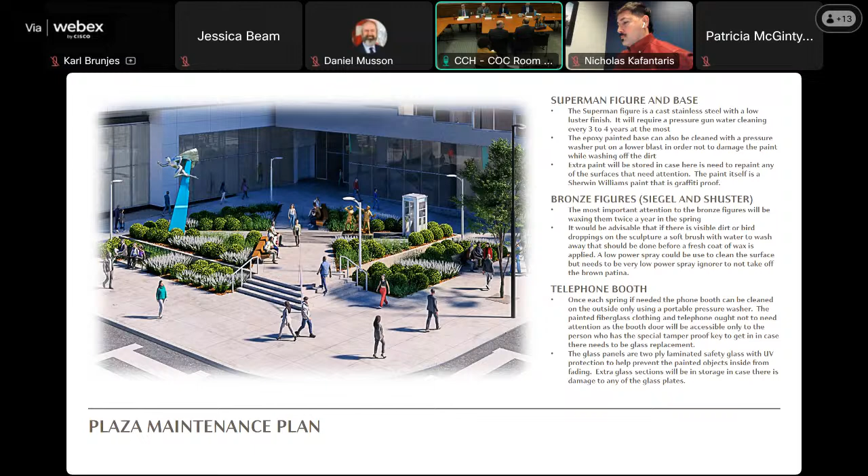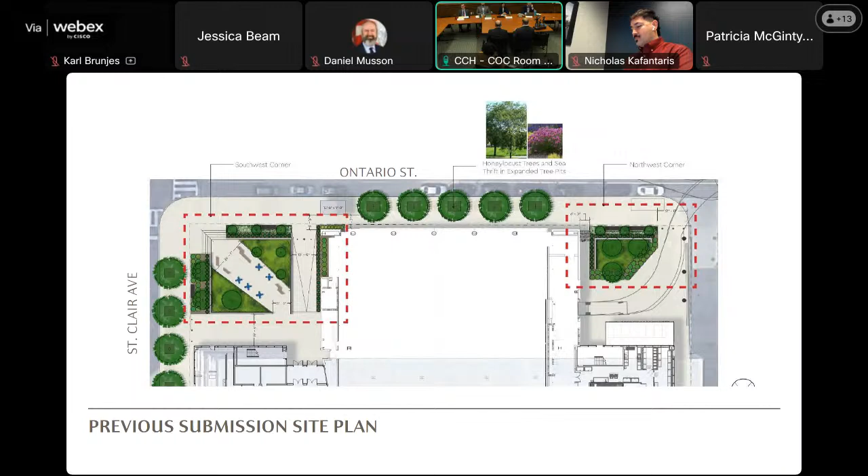When this first came before the commissions and committees, we had presented the following site plan where it was a diagonal swath of concrete that cut through this site with 2 landscape areas on either side. There was a big point about trying to maintain green space. We're trying to keep in mind stormwater runoff, so permeable surfaces were ideas that we wanted to keep. We were looking at this being an activated patio space with some patio, bistro tables and chairs, some soft wood bench seating, and various plantings, as well as adding some trees and foliage to keep verticality and height for green.

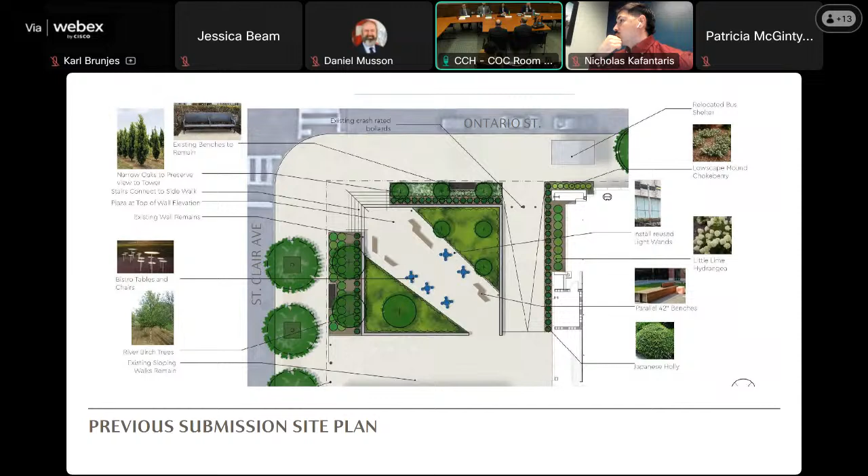When we were approached to kind of reinvent this plaza for the Siegel and Shuster Society, the statues for Superman and Siegel and Shuster, we thought of how we could incorporate these and tell a story. What we decided to do was to narrow that concrete path and cut a transverse path in the opposite direction of permeable pavers to keep that permeability. The design of that opposite path is actually reminiscent of the Superman shield, the S shield that he wears. If you would like to envision it, it is the shield cut in half, flipped and mirrored and pulled, with one side being a little bit larger and smaller and connected. So as a viewer, you're able to get that connectivity to the character just through that representation.

We've also added some areas of green space. This is just grass planting, for people to move outside of the plaza, a little bit more freer space around the area. Again, this is about a 50 by 50 plaza, not very large. We are still looking at adding some wood benches, this time backless, to allow for somebody to view from either side if they'd like to get a better view of Jerry, Joanne, and Joe, or if they would like a view of Superman. And then various plantings around as well. The lower benches that ran along the public right-of-way are being replaced by similar wood benches, backless, as well, and planting is brought around those.

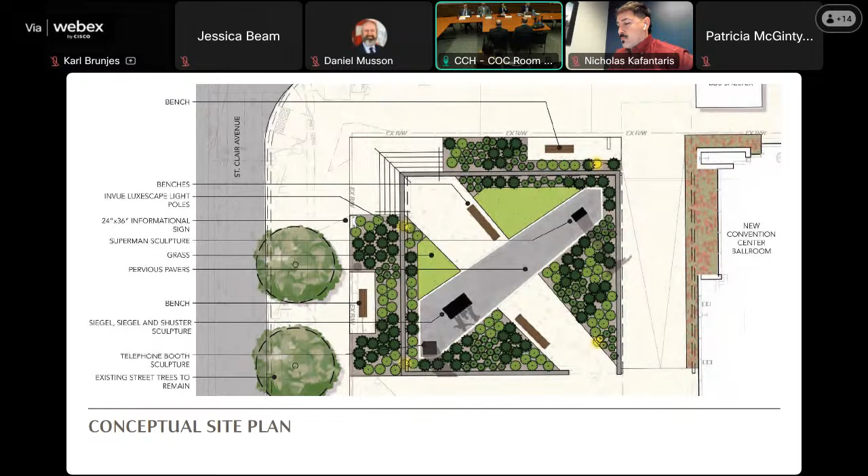As for the benches, we are looking at something backless, again trying to maintain the idea of Superman with that diagonal pitch to the legs of the bench. Pervious pavers will have a field of light and dark gray.

For the planting itself, we're looking at threadleaf blue star, bridal veil astilbe, and tater tot arborvitae. What we're envisioning is something soft, a cloudiness that Superman is flying through. We're also keeping in mind that these plants will change from fall, winter, spring, and summer.

For the site lighting, we're trying to keep in mind a level of futurism, metropolis. Superman's home is the city of tomorrow, and his other moniker is the man of tomorrow. So we try to keep something a little more futuristic, a bit of that UFO look as well, to correlate to his alienness.

Getting more into the detailed drawings, you can see our architectural site plan, as well as a detail for lighting. We are looking at in-ground directional lighting to illuminate the statues at night, as well as 4 light posts around each corner of the site. There'll be an even height depending on location: if on the lower portion of the site, a 14-foot post; on the upper portion, 12-foot, for an even light throughout. We can provide photometrics if needed to show we are providing adequate lighting.

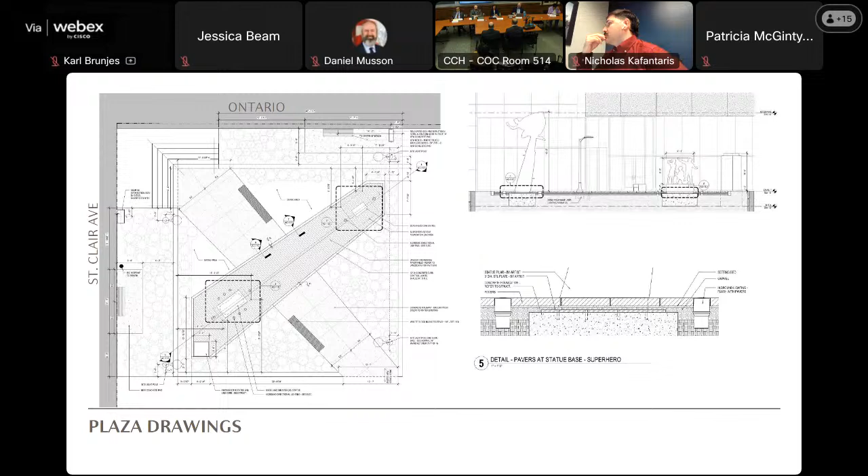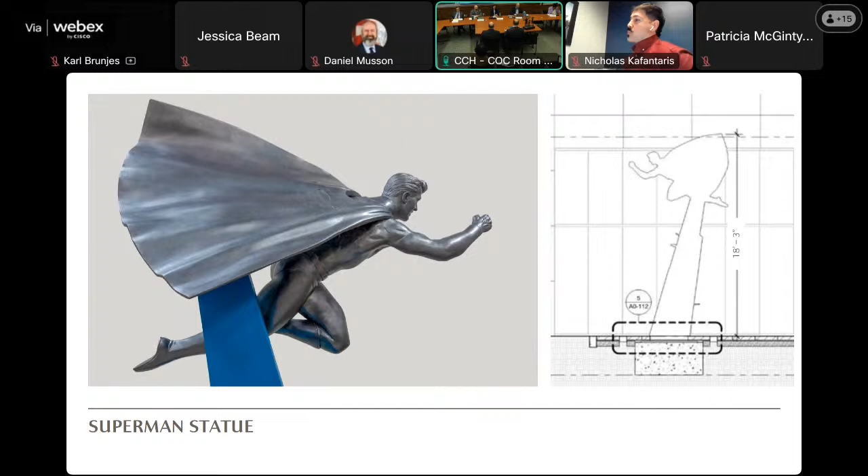The statue of Superman will be in stainless steel, an homage to his moniker, the Man of Steel. A little more detail: he'll be 9 foot, a little over, from tip of fist to tip of toe. His directionality will be faced toward the new ballroom expansion, so if you're in the ballroom, you'll have a front view of Superman. Some nice photo opportunities from inside and outside the plaza.

We are looking at how this base will be constructed. The plaza itself will be installed very shortly, within the next couple months. The statues later on, about 6 to 12 months out. So we did want to keep in mind that we don't want to leave just pavers empty, so it'll be a paved plaza with these permeable pavers. We'll remove them, foundations will be poured now, and then when the statues are ready, they'll be placed in position and pavers replaced.

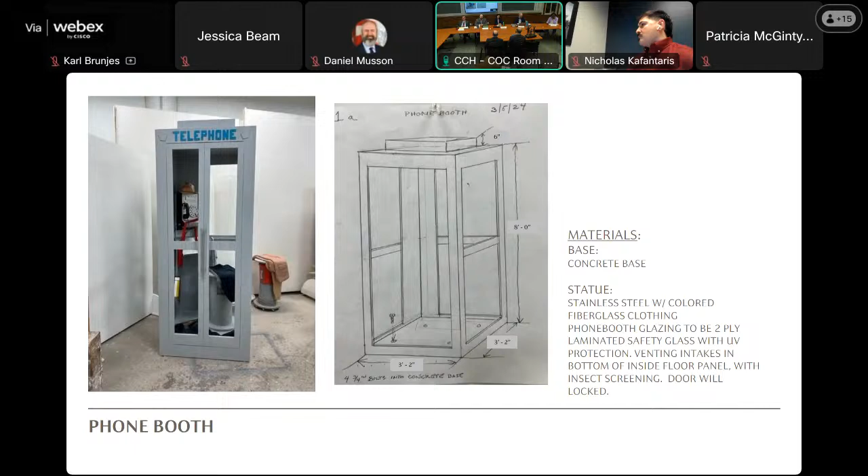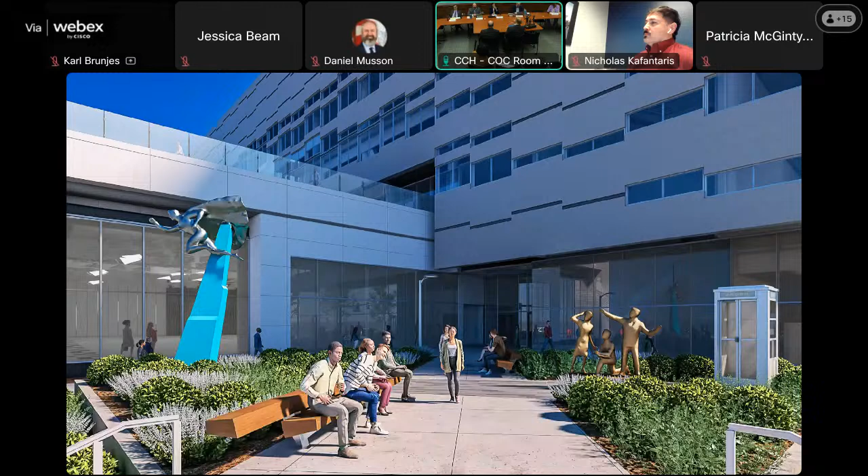So you can kind of see here the pointing up and observing, Superman flying off to save the day. You get a better idea too of how you can see from in that ballroom out what you'll kind of see of Superman. You won't be looking at his toes. And again, this is an older rendering.

The benches will be backless now, and behind the gentleman sitting there on the bench will be grassy areas. We tried to stay away from grassy areas behind the statues, figuring that most people probably aren't going to want too many views of behind.

That being said, we did keep enough space around each statue for accessible movement as well. Some of the best views, however, are going to actually be off of the plaza, right off the public right-of-way. Again, these benches will match the benches up on the plaza now, be wood backless benches, so that if somebody wanted to look up at Superman rather than look out toward Ontario, they could, or St. Clair respectively.

And we are trying to keep in mind, one comment was to place markers for photos. We'd like to install first before doing that, just to get an idea of how this actually looks, actually experience it in play.

And here finally you see a night view. This is an artistic representation of the night shot. This is not fully accurate to what it will look like. There will be more adequate lighting, street lighting behind, and of course probably some lights on in the building as well. But we really wanted to show you kind of what we were hoping would become almost a focal image.

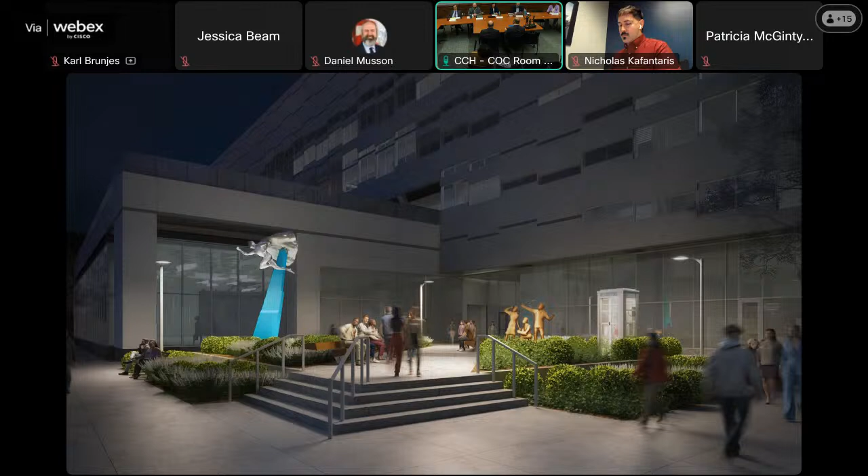Of, you're watching Sunday night sports, maybe the Browns are playing, or maybe you're watching the Cavs game and they do those shots around the city. And we hope this would be one of those shots you'd start seeing, making sure everybody knows that Superman was made in Cleveland.

Jerry, as I'm sure many people know, Jerry and Joe were from the Glenville neighborhood, two young men who created what might honestly be one of the biggest pop culture icons in our nation's history, if not the world. They created the superhero. If not for Superman, we would not have the cultural landscape that we have today. Marvel, DC, and the litany of other characters, homages and pastiches of each, wouldn't exist.

And we want to honor that. They're Cleveland born and raised. This character is a part of Cleveland's history, and we're really excited to honor it. So that is all I have. Thank you guys so much.

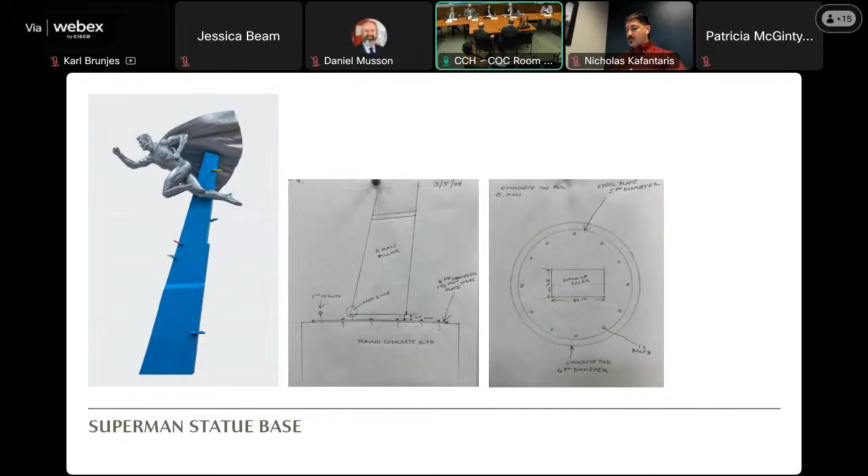You mentioned the paint. On the paint color, the first, lighter color was the color we had in those photographs. On the site it looks lighter, but that's because of how the computer registers color. The question was whether a slightly darker color would be better for the area, and I agreed with that comment, so I came up with this slightly darker blue. It's deceiving in this room because of the low light, but outside that darker blue will still pop a little, just not too much.

I was more curious about graffiti. The paint, I had used Sherwin-Williams paint on a big sculpture in Austin, Texas about five years ago, and somebody about a month after it was installed took white paint and painted over it. The next day they cleaned it off, and you could not tell. They didn't have to repaint it or anything, they just washed it off. It's an extraordinary epoxy paint.

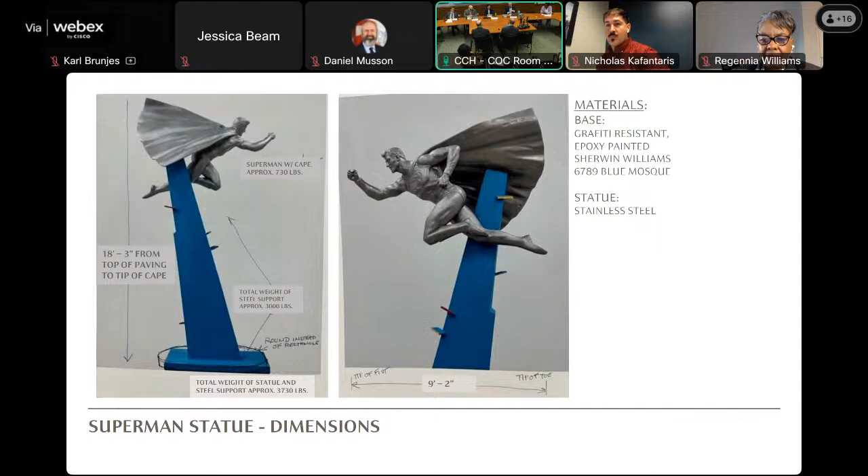I guess I'll make my comments. I reinforce Mr. Samberry's question. That would be my concern, just knowing people and how they like to climb everything, that the projections may not encourage, but also not deter, people from climbing it. I'd encourage you to look at how far they project out. I like the movement it provides, but the projections do concern me a little bit, knowing people will climb anything.

And anything over an inch, somebody can climb if they really want to, because of rock climbing and things like that. So I would really focus on those as you're developing your final design. Would some be better as a recess, something cut out that could be painted, to not provide enough distance so people can't climb the base?

My only other question or concern - I should say I really do like this entire composition. I think it's a wonderful location. I like the irony and I like the design, but my only question relates to the materiality of having 5 different materials between these 3 different sculptures, and not having that thread to allow people who may not be as familiar with the Superman story - it's very understated, which I like - but at the same time, that thread that ties them all together so people know this is not 3 different sculptures, it's one story being told. Because you have the stainless steel, the bronze, the granite...

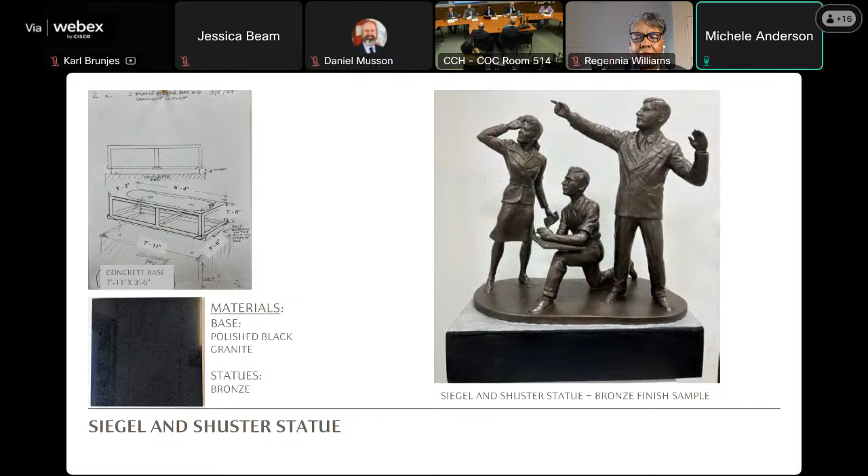I want to say that I am in agreement with all of my fellow commissioners and their wonderful comments. This is a very exciting project for the city. I have a couple of questions. One concerns the bronze statues of the three bystanders. I don't know if we can go back to the photo of that. There we go. I'm not sure how high up they are on that base, and maybe it's the angle of this photo, but the proportions, especially of the gentleman pointing, it seems like his legs are extremely short and his arms are kind of long. So I guess that kind of bugs me.

I'm in agreement with a lot of the chairwoman's comments about tying the sculptures together a little more, referencing them together. Hopefully there'll be a plaque which explains the story to people who aren't that familiar. I mean, I know we're all familiar with the story, it's very much a part of American culture, but if you have visitors from somewhere else, they may not be that familiar with it. I also wanted to know if any of the descriptive texts, informational materials, or QR codes make any mention of the artist who created this work. So those are my questions and comments.

Thank you, Ms. Anderson. Would someone like to address the questions? Well, to respond - I'm Gary Cap, I'm president of the Siegel and Shuster Society, the nonprofit, and I'm also a relative of Jerry Siegel.

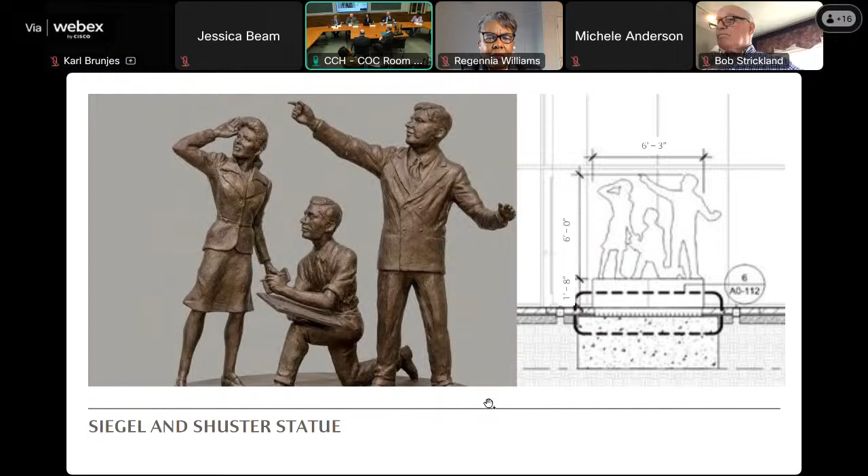Thank you, Mr. Strickland. Mr. Dulick. Yes, thank you, Madam Chair. In addition to echoing my fellow commissioners' comments, I want to commend everybody involved for what can really be characterized as an appropriately heroic effort. But what really bears special commendation is that you've proactively thought about this for the long term. I can't say how much, personally, and I think I can speak on behalf of my fellow commissioners, that we really appreciate that because it is a concern. The fact that you've embedded that in your project and made it a piece of the whole engagement with your donors is especially commendable.

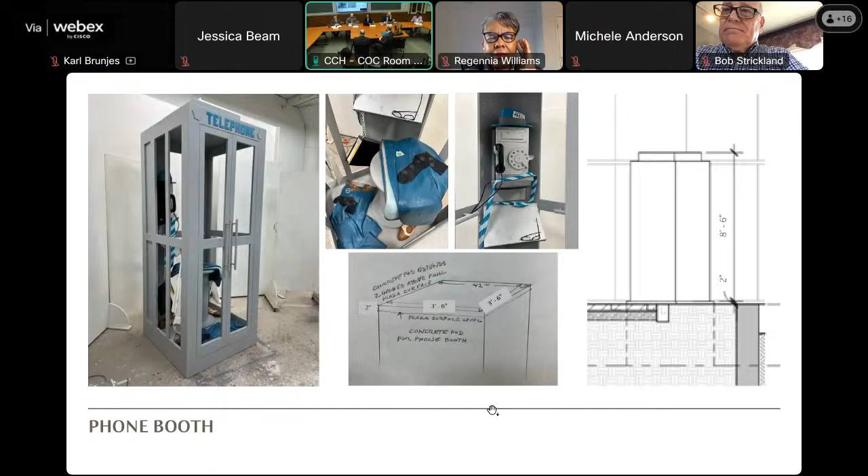Awesome. Speeches. Thank you. One last thing I'd ask regarding the signage, maybe as a condition of approval: in addition to crediting the artist and having a title on the signage, also maybe somewhere on the sculpture base, that there's a year of installation included as part of that information. And for the text of the signage, if they could have it sent to staff for final approval, administrative approval for the copy. So we're just sidebarring here, I don't think we can make that a condition of the approval because we deal with materiality, not the content of the art or the signage.

Is that correct, Mr. Russell? That would be my evaluation, yeah. So I think they've obviously heard your request, but we can't make it a condition of ours. I think we've heard loud and clear the desire for signage and really the recognition that all parties deserve related to that, obviously most importantly that the foundation has been persistent in getting this forward in the history. Yes. I was just going to say that typically I sign all my work, only inconspicuously enough so it doesn't get in the way.

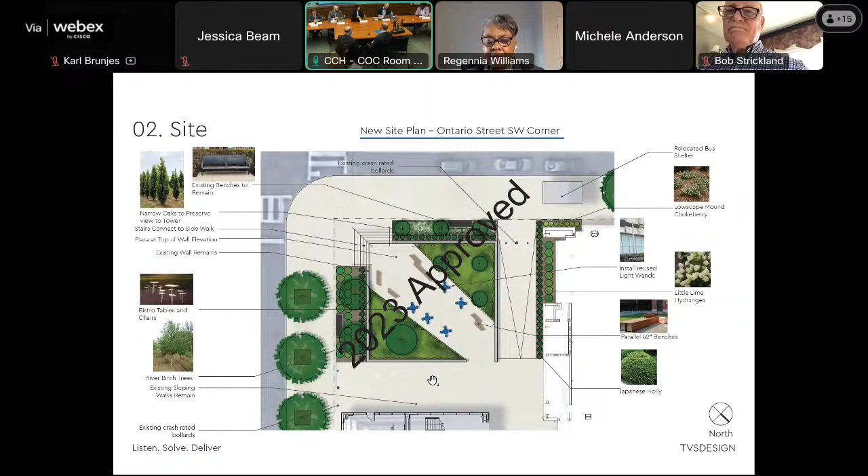Mr. Musson, please call roll. Ms. Anderson, yes. Mr. Dulick, yes. Councilmember Gray, yes. Mr. Sandberg, yes. Mr. Strickland, yes. Mr. Trosick, yes. Dr. Williams, yes. And Ms. Trout, yes. Madam Chair, the motion passes unanimously.

Congratulations, good luck with the installation. We really look forward to seeing this installed. When is this going to be installed? We're putting in the foundations as part of the expansion. Now that we have approvals, Mr. Gazzo is going to go full strength at getting the final funding for creation of the statues, but we hope in April of 2025.

Excellent, it's very exciting. Thank you for all of your hard work and your persistence. Thank you. Thank you.

We'll now move on to our second applicant, located at 7820 Euclid Avenue, New Life at Calvary Church, roof tornado damage repair.

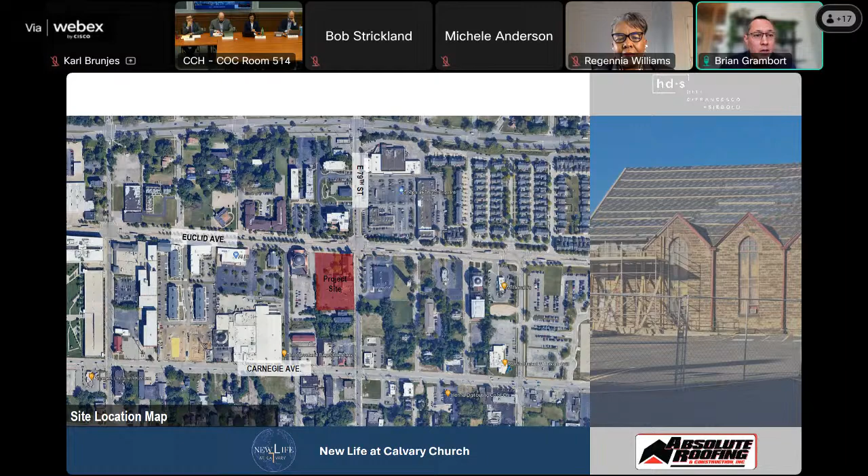One moment, technical error. There we go. So, somewhat of a bird's eye view of the site. The historic portion of the 144-year-old church is at the top. There's a second section of the building called the parlor, identified here. What we're really focusing on is the fellowship hall, or in this case called the school, highlighted in yellow at the bottom of the structure. That portion of the church really sustained the most damage. There was considerable damage to the existing gym just to the left, but that received some emergency roof repairs. So for this presentation, we're focusing on the school.

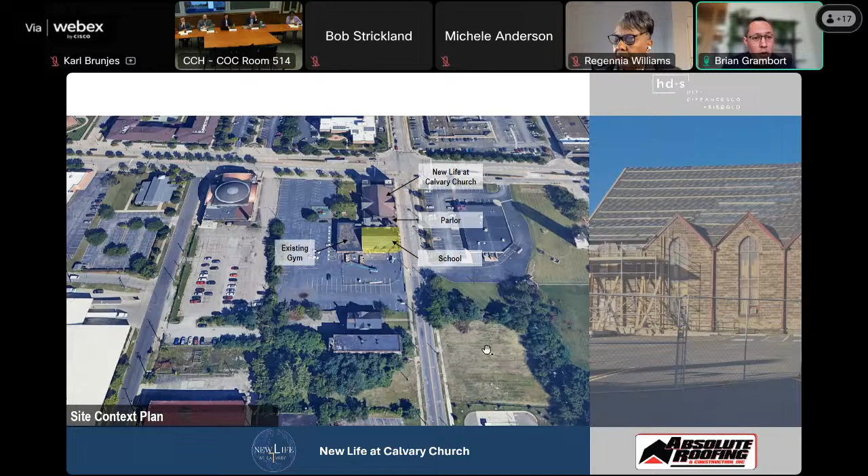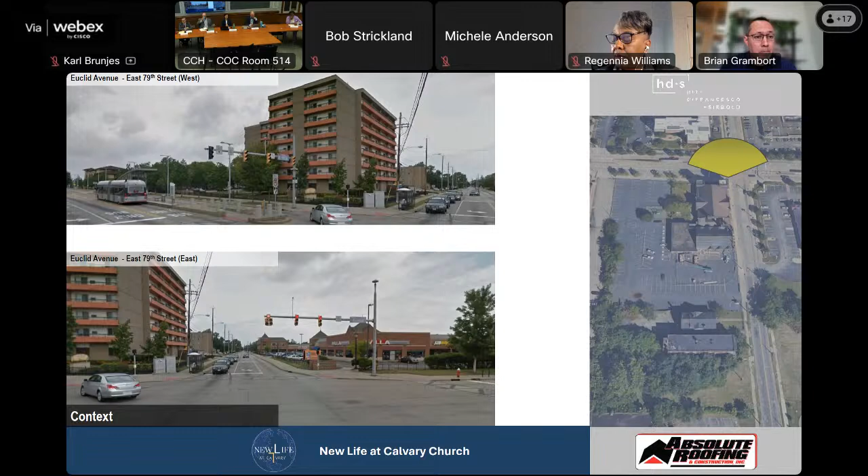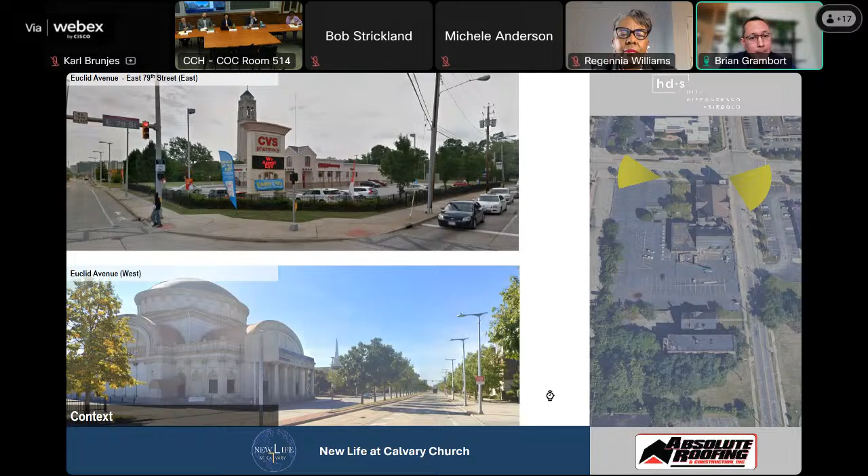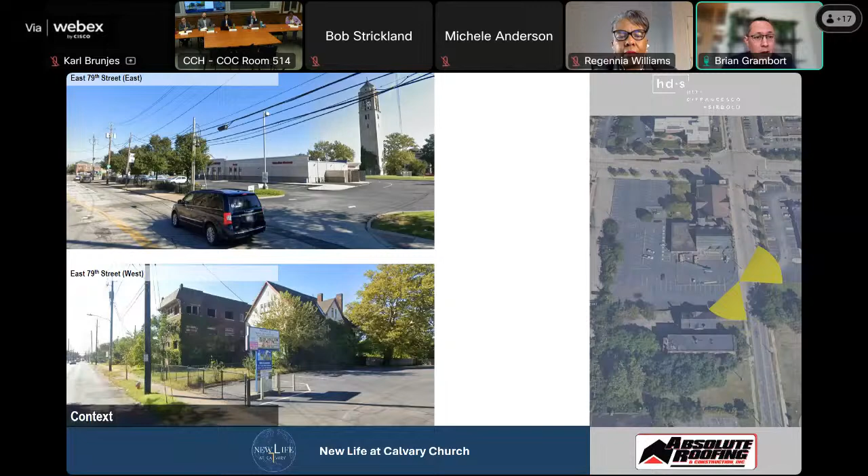Next slide. I'll go through a bit of additional context. What we're seeing here are photos north of the property, the Rainbow Apartments and the strip mall across the street. Next slide. The CVS and the temple just to the west. Next slide. And then the photo at the bottom is turning into some of the more residential parcels immediately to the south. Next slide.

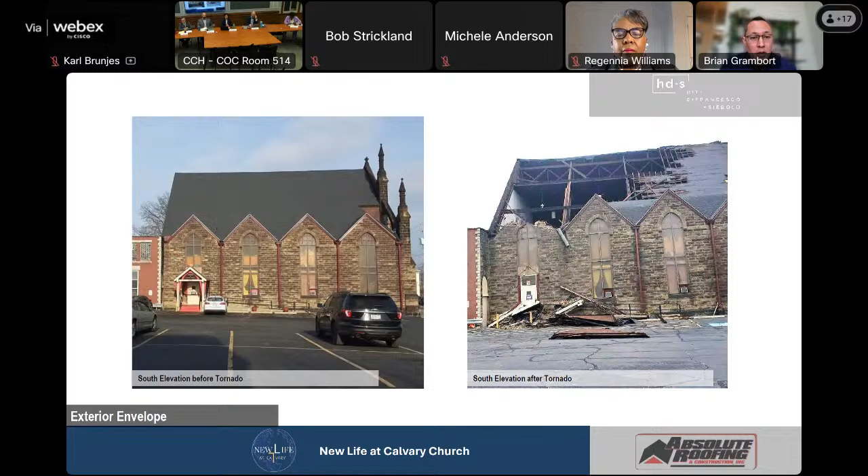So on the left is pre-tornado. On the right is shortly after that, August 25th of last year. You can see the considerable amount of damage to the roof itself, as well as to the west or left dormer. The vertical window and the frame actually was still in place and was relatively unscathed, but certainly all of the stone and the masonry backup was torn off. Next slide.

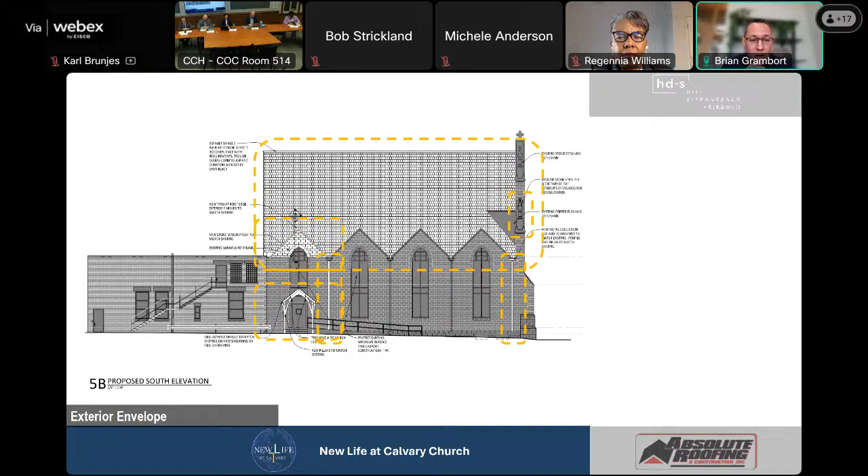So in this case, apologies, I set this up as a PowerPoint, but all of these areas that are identified are what we want to show as part of this repair. First, as already mentioned, is that western dormer that is being rebuilt and restored. The second part is the majority of the roof on this side, which is the south elevation, as well as the north elevation. At the bottom of the elevation is that structure, which you see in small detail here, and we'll see some enlarged plans. There are also some collection boxes and rain conductors that we are replacing. And then last, on the exterior, are some miscellaneous repairs, including some spire damage, which you see on the right-hand side, fronting along East 79.

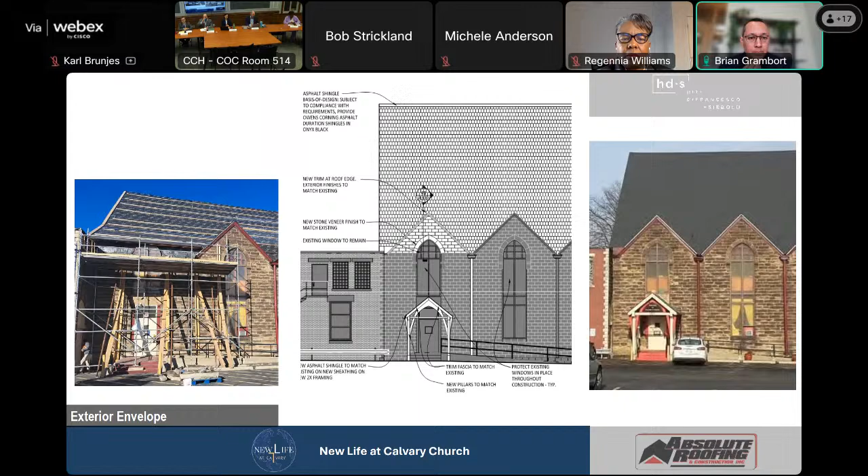Clearly, the existing stone has that patina that we all know and makes these buildings look the way they do. So in this case, our proposal is to stain the stone with a mineral stain, a NawTone-K stain, that we've used on other clay masonry and stone projects and had some success with. The intention is to stain the new stone to match that patina.

We're also in the process of doing some mock-ups of the mortar. We're pretty close to getting a good, appropriate match, but also making sure that we have the right tooling and mortar joint sizes. So we're kind of in that process right now.

Something else that Pastor Kelly and ownership are considering, beyond just the south facade, is a cleaning and further restoration of the entire facade. There is a process that we're going through right now to determine if that's even going to be considered and what level of cleaning. We're recommending relatively mild cleaning, if anything at all. But that's still in process.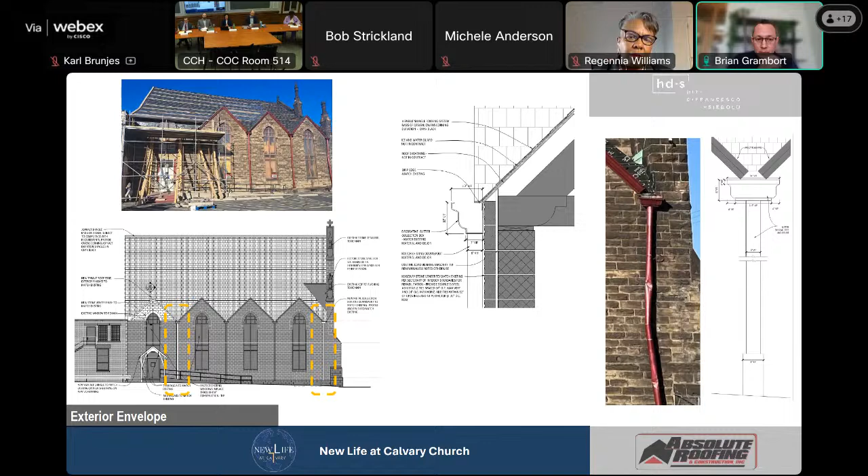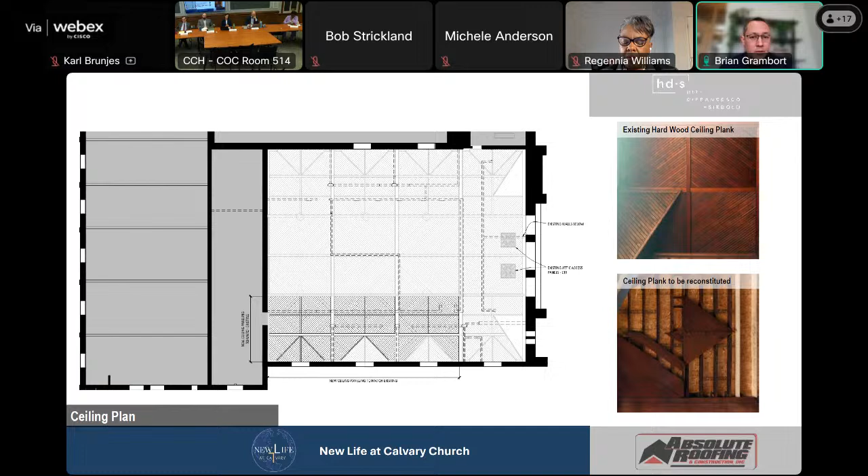That is the extent of the repairs that we're presenting today. Appreciate your time and be happy to answer any questions you have.

Excellent. Thank you for the presentation. We'll then move to reviewing Design Review Advisory Committee recommendations.

Thank you, Madam Chair. Certainly not often that we see tornado damage, so this was an interesting case for the committee. They were very supportive, felt that the proposed repairs meet the Secretary of the Interior standards, and commended the church and the architect on their attention to detail. They recommended approval as presented.

Excellent, and then Landmarks Commission staff. Thank you, Madam Chair. This was an interesting one. I was able to go out to the site myself immediately after the tornado as well, so I had my own photographs. It's also the same tornado that damaged Dunham Tavern, so it cut a pretty good swath through there at that time.

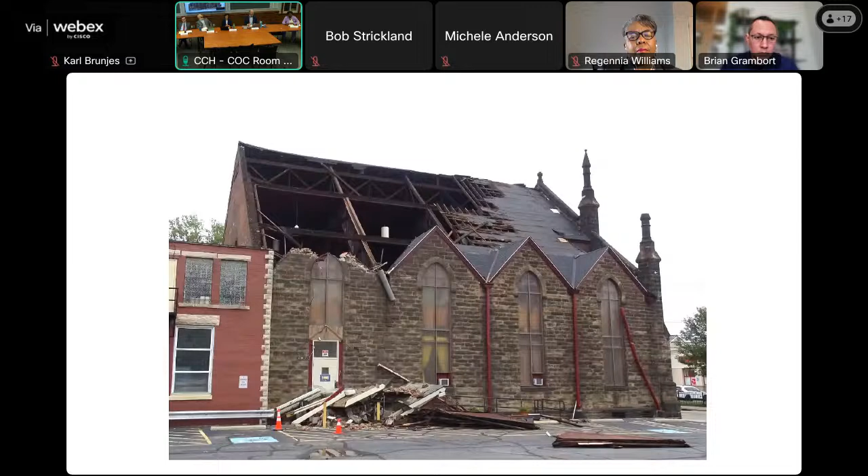You can look behind you to see the slides. I have some interior shots as well. So this is in keeping with the Secretary of Interior standards. It is important that... there we go. There's the one slide behind from the interior view, and there's the exterior view.

So we are in support. It is appropriate, and we commend everybody for getting this done. We signed off on the temporary roof permits administratively just to get the envelope sealed earlier, so further damage couldn't be done.

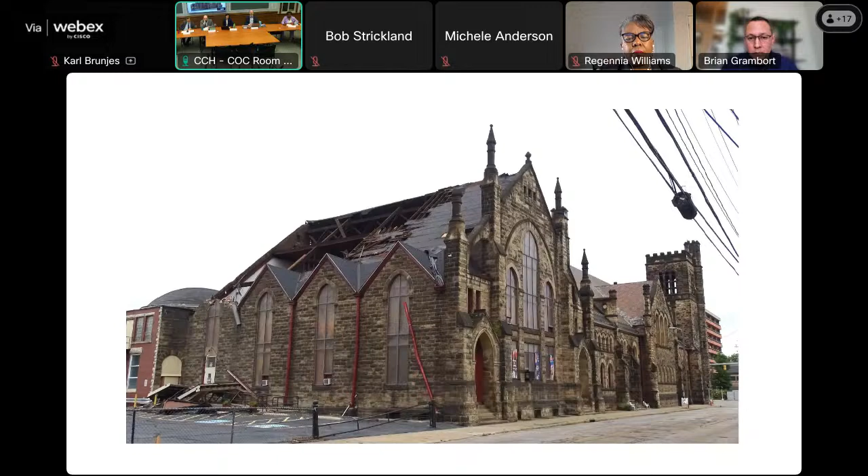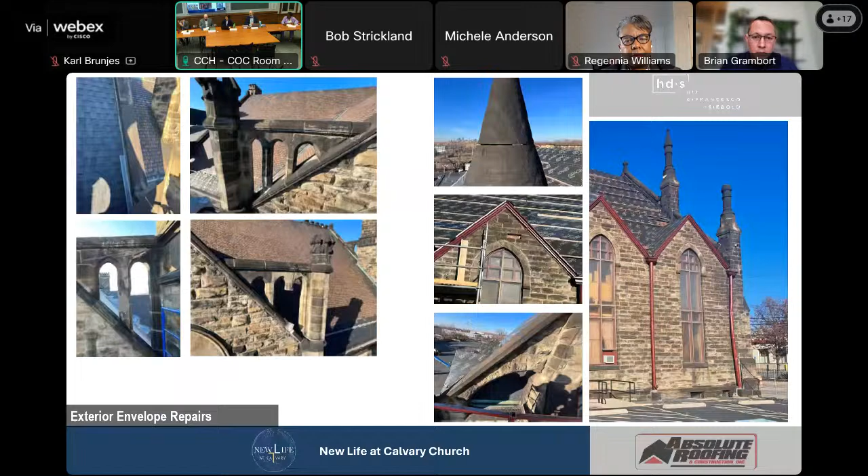I guess Mr. Sandberg? Sure. Thank you, Madam Chair. First, I think you're doing a great job of restoring what was damaged. Everything sounds like it's within Secretary of the Interior standards, and I think this is a great restoration of what was there. I have a couple questions.

First, about the cleaning, I would recommend cleaning the masonry before you stain the new, just so that you're matching to the clean version instead of the dirty version. Same with the mortar: try to match to a cleaned portion of mortar before you match it, or match something that was not outward facing, so you're matching to the true color.

The other comment I have is about the handrails. Just a question of, are you mounting those to the ramp, or are you mounting them to the building itself? The railing itself will be mounted to the concrete slab. Okay, so they're going to be spaced away from the historic stone elevation. It will not anchor to the stone.

Yep, that's correct. And absolutely on the staining, the cleaning will come first. It will need to be first, which will determine to what extent what staining would be appropriate. So in agreement there. Great. Those are my only comments. Thank you, Mr. Sandberg.

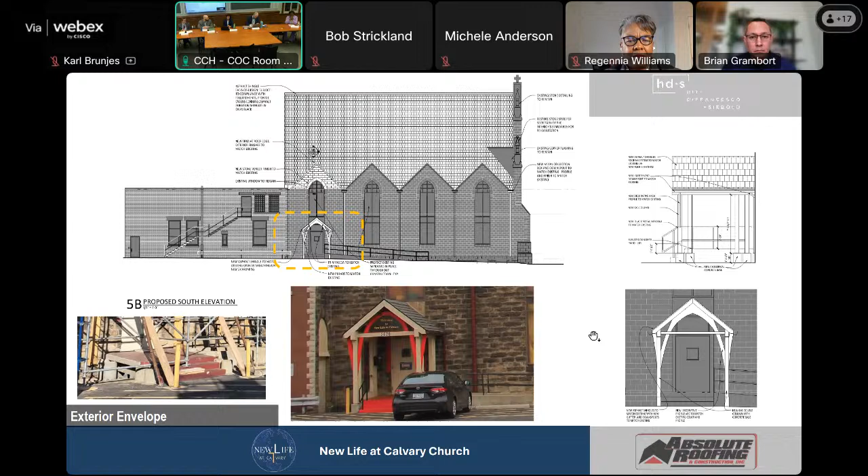Can I suggest one recommendation, or requirement I should say, to return for any signage? And then the recommendation to remove, your recommendation for cleaning prior to any staining, and for masonry repair. Yes. All right, so we have a motion on the table.

Do we have a second? I'll second that. All right, Mr. Dulick seemed to state it first, so we have a motion, we have a second.

Any further discussion? Madam Chair, would you like them to confirm all final choices with staff for mortar? Yes. Mr. Sandberg, do you support that? Mr. Dulick? Yes. All right, so we'll add that in as a requirement to return and submit to staff for final mortar colors prior to performing the work.

Any further discussion? All right, Mr. Nelson, please call roll. Ms. Anderson? Yes. Mr. Dillard? Yes. Councilmember Gray? Yes. Mr. Sandberg? Yes. Mr. Strickland? Yes. Mr. Trassick? Yes. Dr. Williams? Yes. And Ms. Trout? Yes. Madam Chair, the motion passes unanimously.

Excellent, congratulations and good luck with your project. Thank you so much, everyone. Have a good day. You too.

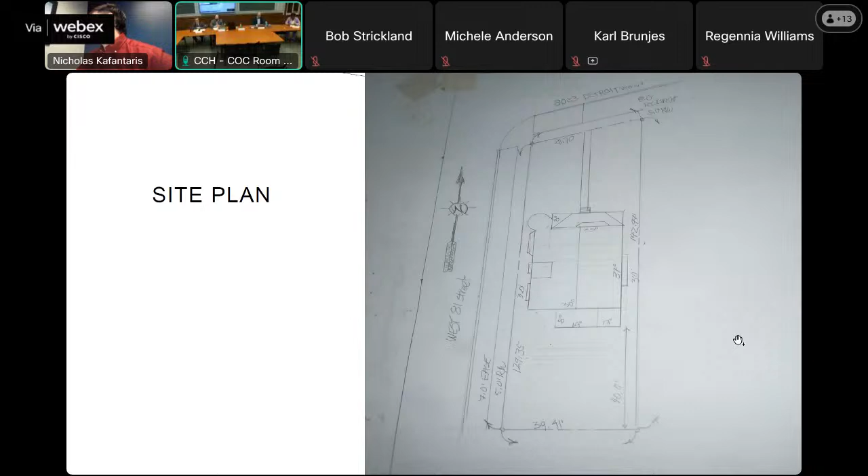Okay, a little bit more information on the site and the parcel. I don't think this is necessary, so you can probably skip this. I think this is kind of a placeholder where the site plan should have been. So, but a little bit more from the auditor's website.

All right, so here's a drawing of the back deck area. Kind of a bad connection, but as you can see, there's already doors there from when this was made into apartments. As I mentioned before, you can't really see it from here, but where the chain link is, is a parking area.

I'm going to dig that out and extend the backyard and create a little herb garden and possibly a bird bath and a fountain. My idea is to give those two back bedrooms a little bit more oomph, more excitement, and keep those doors back there, not make them into windows.

And raise that deck, remove that pitched roof, raise it up to code, because you can't step down onto an outdoor patio. I guess it's against the rules. Raise that up and have a balustrade around there, replicating the balustrade spindles that we had found, luckily, inside the house.

So those will be replicated at Cleveland Lumber, and that little deck area, as you can see, which was nicely drawn by Mr. Hollis, will be where you can overlook the herb garden and take in the fresh air.

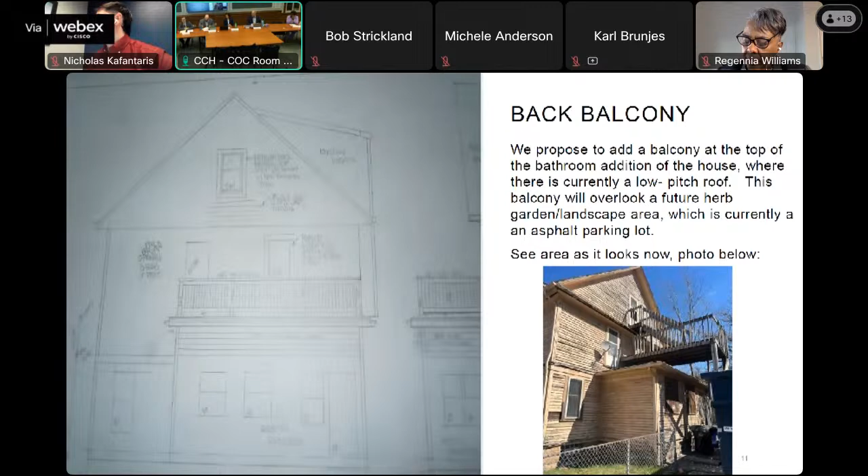A couple of my questions - it's been a couple years since I lived on that street, but it did have some foundation issues. Is that still an issue? Have those been fixed or modified, or is that within your scope of work? Absolutely, there'll be tuck pointing and fixing of the foundational issues as part of the construction loan award. So yes, that's part of it.

Are you planning to convert the house back to a single family, or are you maintaining the separate multifamily divisions? This will absolutely be a single family. All the interior Victorian elements were stolen years ago. I have been purchasing new mantles, new newel posts, and new details, and it's going to be a single family as it once was.

The current windows are the historic wood windows, is that correct? It sounded like pocket weights and things like that. They're from 1905, they look to be the original ones, most of them. And then you're proposing a black vinyl window? Yes.

Typically we don't approve vinyl on all elevations, specifically black, because it tends to warp over time. You may want to relook at your color choices - that may not give you as long of a lifespan as you're hoping for.

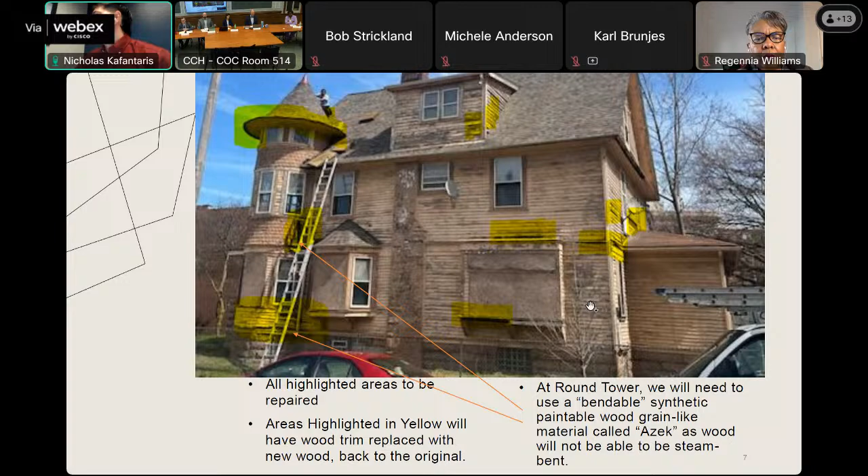And what color will the house be? There was a Victorian color scheme, I think, second to last slide. All the wood that's in good shape will be chipped and repainted. Whatever has to be replaced will be replaced in a manner that is seamless, and once you paint it, you will not be able to tell the old from the new.

Okay, yes. All right, that's it, Madam Chair. Thank you, Councilman Gray. I'd like to echo what my fellow commission members have said. I commend you for the focus on your details and really trying to restore this. I also live very close to this and ironically was just admiring this house two weeks ago as I was driving past it, wondering when it would be restored.

So it's great to see it come forward. I echo the comment though on the windows. Usually we do not accept vinyl. I would make the exception on the rear and sides, but I think the front should be a composite or an aluminum clad wood to be consistent with our requirements.

In this case, I also echo the concern of Mr. Stanberry about vinyl in darker colors, that they don't perform that well. And so with such a large investment that you're making in this house, we want to make sure the windows perform the way that you want for the longevity of the house. So I would recommend that you investigate a composite, which is a little bit more cost effective than an aluminum clad wood, but does maintain its performance better than a darker vinyl.

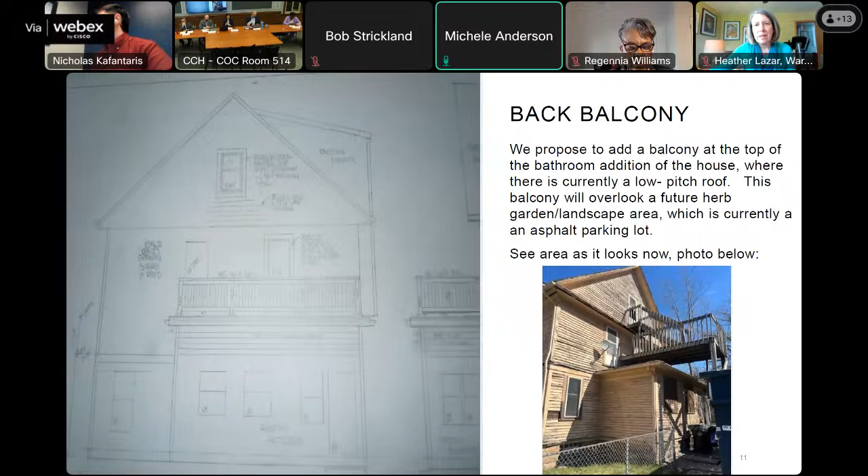Given the financial restraints, because rehabbing a house like this is incredibly expensive, especially doing it correctly, which you are trying to do, and given the level of detail you're focusing on, things like the chimney—you could just repaint that, but no, you're going to bring that back as a key architectural feature—I'm almost inclined to give you a pass on the windows. We've allowed vinyl windows in the past in hardship situations. If you can get more funds from the Restoration Society, I would go for the composite window, because it's going to be a better quality window and serve you better over time. But I'm inclined to want to make this project work for you, because you're really making it work for the community. I think it's going to be exemplary for other people who buy deteriorated houses, to see that this kind of home can be restored.

I have a question, just a clarification. There's back decking that looks like it reached up to a third floor, probably a suite, like it acted as a fire escape. That's all going to go, right? That's already gone. Okay, that's gone. And that door on the third level is going to turn into a window. Okay, all right.

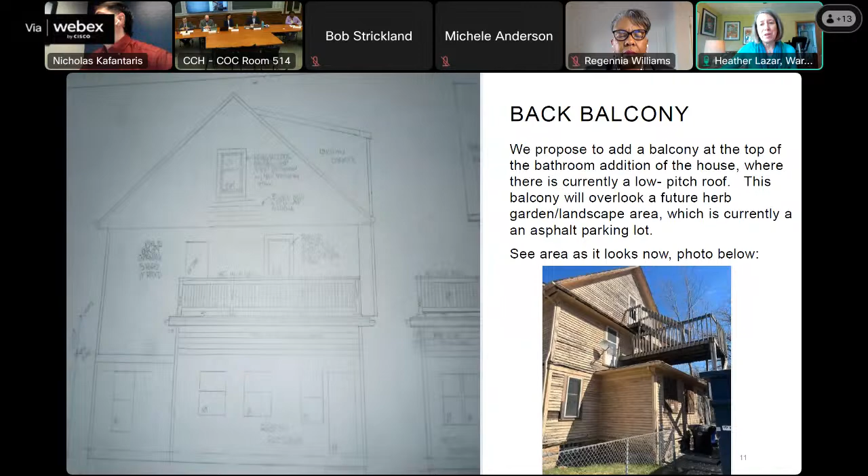I just wanted to add one additional comment that I forgot, so thank you for letting me chime back in. Mr. Kafantaris, we want to commend you also for supporting a local business and using Cleveland Lumber. It is also in Ward 15, and there's just a gem in the neighborhood. So thank you very much. I think the project, as you've described, is just going to be a true benefit for this historic district.

I hope so. Thanks. Thank you. Thank you for those additional comments. Other questions or comments from the commission, or would someone like to put forward a motion?

Madam Chair, I'll make a motion to approve this project as presented, with the recommendation that they look into other window options, other window colors, as well as the paint colors on the AZEK board. And I encourage you to look into the Cleveland Restoration Society's program.

Are there any other comments from me? There's recommendations or requirements, sorry. Those would be recommendations, strong recommendations, not to do a black vinyl for the longevity of your own house and your endeavors. But I think it sounds like the board is okay with giving you a pass on vinyl, so that would be a recommendation.

Okay, so we have a motion on the table. Do we have a second? I'll second that with one qualification. I second it as long as, as an alternative to the black vinyl, we don't have white vinyl.

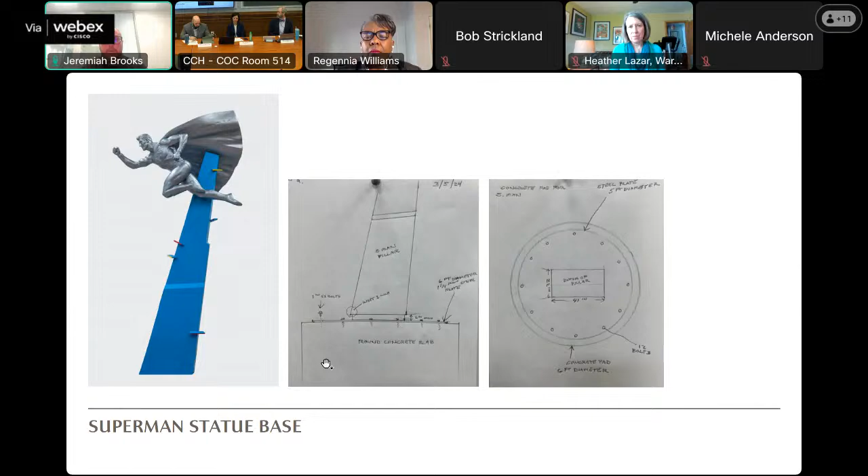What we have to present today is an early version of what we're hoping to follow through with. I want to reiterate it is early. These are our massings, but we are also working through this with OHFA, and we have a unit count and mix that we need to hit. We're very excited to work with the commission and the community, which we've already reached out to, and to accommodate as many of these comments moving forward, really looking forward to the comments we hear today to improve the direction of the project overall.

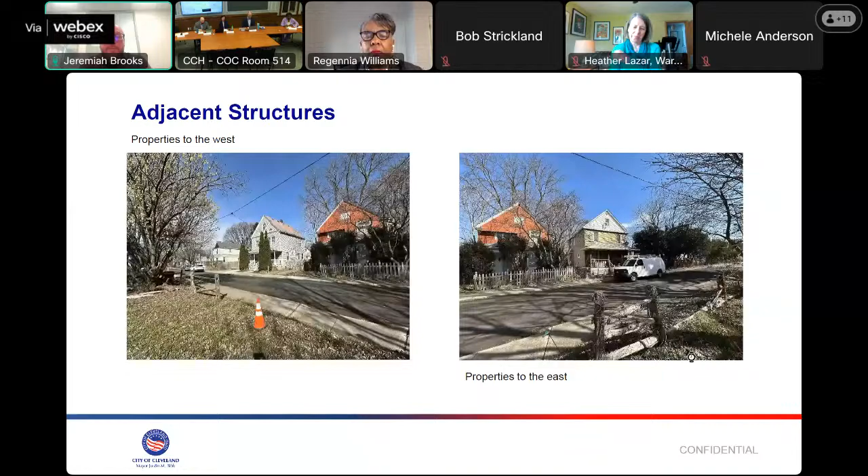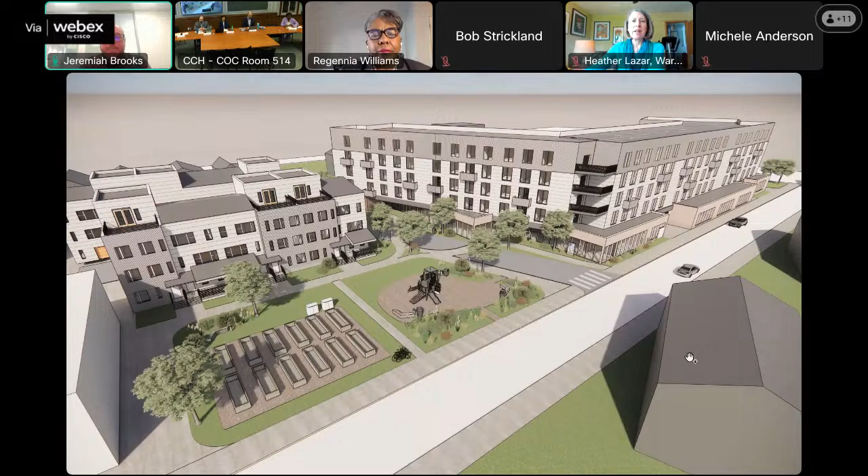No problem. So I can get started by saying that the site itself is on Detroit Avenue, situated between 74th and 75th. Part of that overall site plan is to be a walking path extension of Clinton Avenue. That view we just passed was from 74th towards Clinton Avenue.

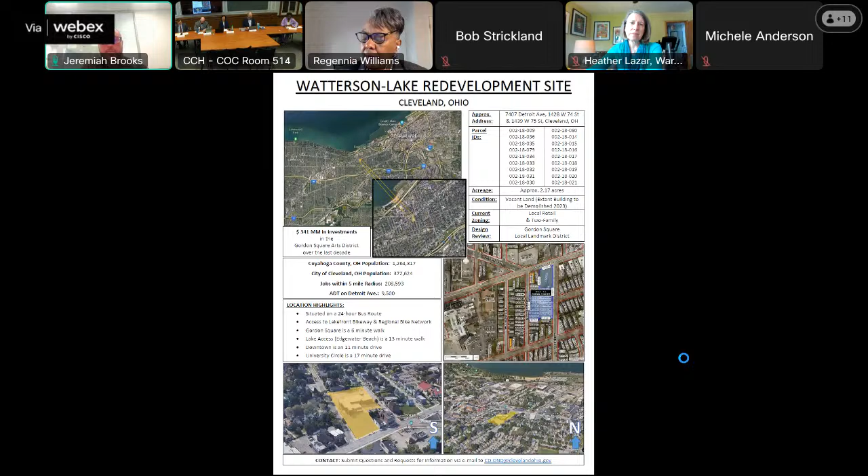We can take it from this slide that just shows the site context and the number of parcels that were allocated for this development. The site did house the old Watterson Lake Elementary School, which was razed for this project, and prior to that, there was the historic school that sat on the corner of Detroit and 74th.

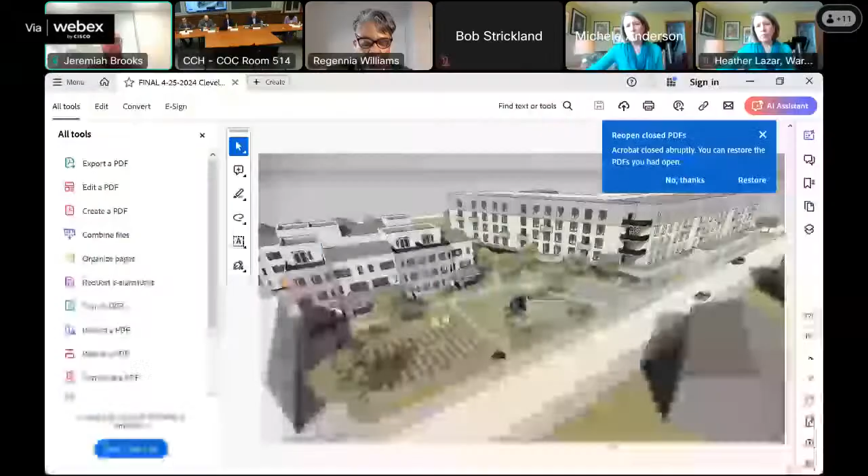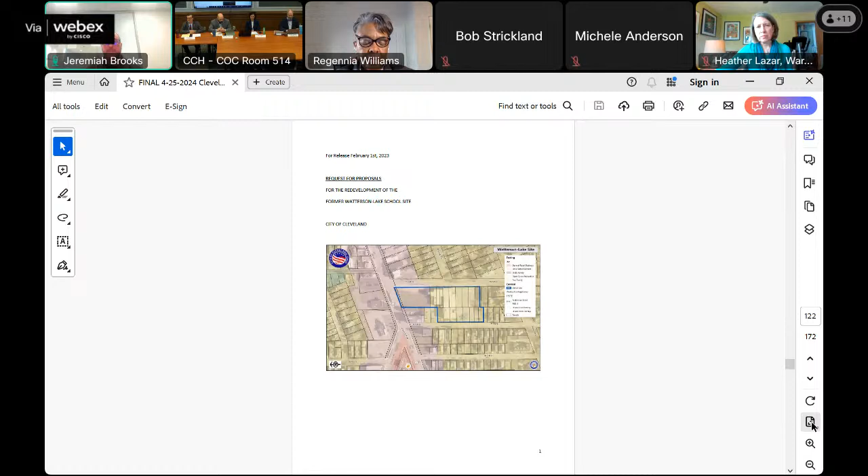On 74th, between the Clinton Avenue extension and the rest of the site to the south, would be our open green space. Right now we have a playground planned, which we heard was really important to the community since they lost it in the demolition of the school. We've also allocated additional green space, whether raised planters, a pocket park, or a pollinating garden—those are all things we're considering as we move forward.

This slide orients the site. What's outlined in blue are all the parcels allocated to the site.

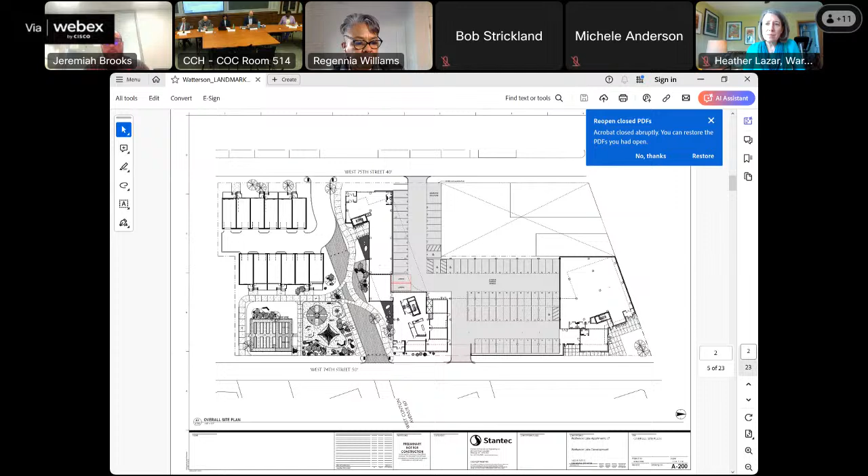The next slide was just the upper floors. Typical units in that multifamily tower, we do have a mix of 2-bedroom, 1-bedroom, and studios. And then those townhouses are a mix of 3 and 4-bedroom units, so we've really got an opportunity to provide a variety of different housing types depending on what that need is.

These are a few axons, again just the early massing. We have the taller residential tower pulled back from the street, but we are maintaining some low first floor, those lobbies or the residential lobby adjacent to the street, the screening for the parking, and of course on the retail side along Detroit Avenue, bringing that building fully onto the street, but the upper portions we do want to set back. We do realize the scale, the height of the building is at the higher end of the zoning regulations and what's around it, so we didn't want to crowd too much. That was one of our options to address that.

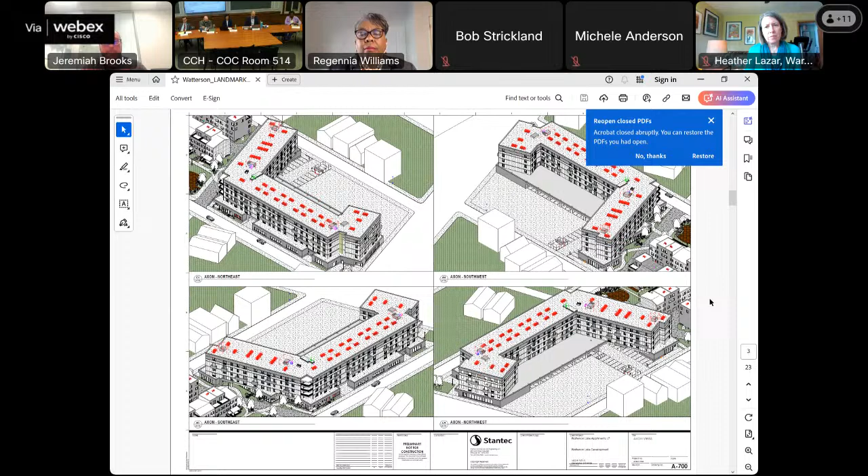Typical upper floor layout. That little bit of green space is a cover, second floor canopy over top of the parking that would be some green space for residents. You can kind of see a little bit of the shaded profile on the plan south and plan east of this drawing, that are the lower roofs and how that addresses the actual street frontage.

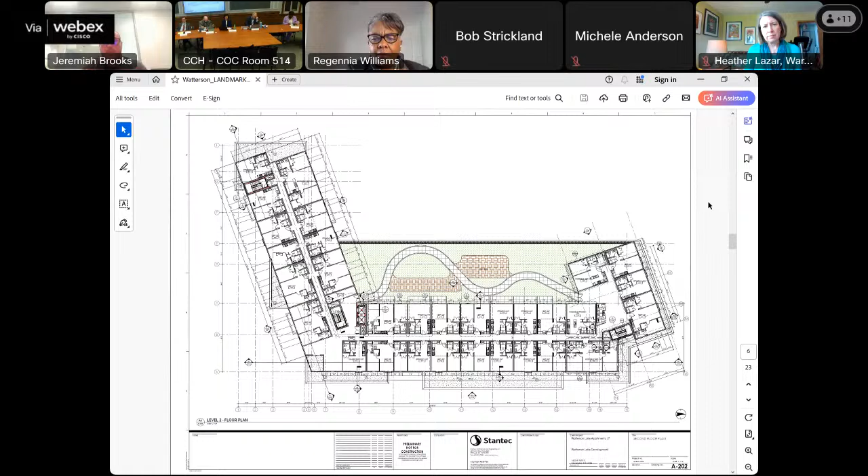We would like to have a first floor be masonry, tying into more of the historic nature. We know we have to develop our fenestration patterns and how those relate to the adjacent buildings and the fabric of the street. Our upper floors, 2 through 5 of the residential aspect, will probably most likely be a cement board or another wood siding product. Floors 2, 3, and 4 we wanted to be a bit of a field, and then the top we would like a more dynamic material as we get further into that selection, trying to recreate a bit of that first floor base on the retail building, and then cornice as a reinterpreted style, making the facade a little more dynamic as we introduce balconies using that same material we have at that cornice level.

We understand that it is a long building, and there are some challenges with the scale and budget associated with it, but we want to make sure we're providing a building with a dynamic facade that's not just flat or one-dimensional. We're really pushing to get some depth and create shadows to create a layered facade.

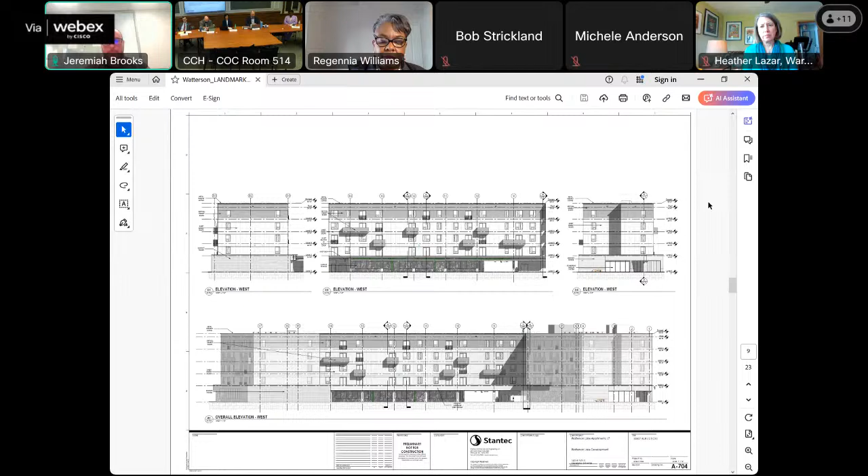For our townhouses, we originally proposed 3 and 4 story buildings. As we've developed this, we looked at the size and scale of the neighborhood and liked the recommendations to lower those into more scale. So we're recreating the massing to top out at 3 stories to better integrate with the adjacent community. That was the concept all along: Detroit was our largest scale building, using that extension of Clinton Avenue as a delineation path to where we'd transition to a mid-rise building more akin to buildings along Detroit. Once we got south of the Clinton Avenue extension, we'd fall into a more residential scale at 3.5 stories with roof lines and pitches.

As I said before, these are early massings, and we heard in previous presentations interest in more traditional stylings and architecture. So those are things we're considering right now as we further develop these plans.

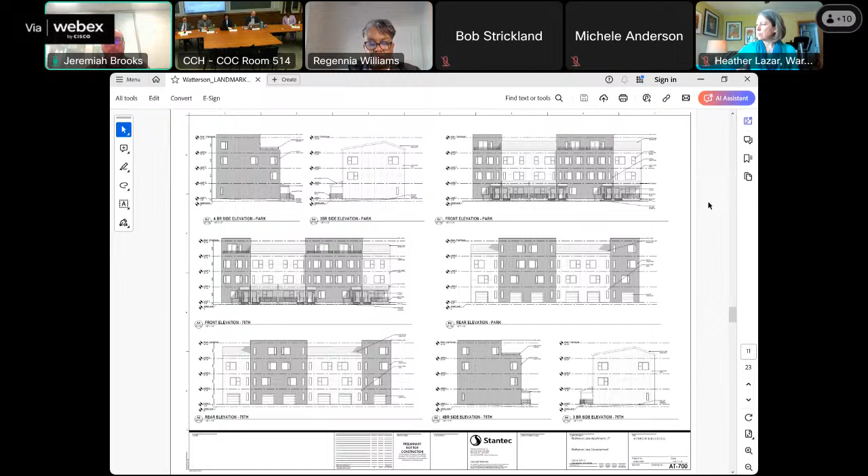Again, not entirely representative of the final selection of materials, but these are some massings showing scale of the building, massing, setbacks, and fenestration patterns.

We're also continuing to incorporate a lot of landscaping. As we spoke at our previous meeting with Gordon Square, including street trees with the traditional curb-tree-sidewalk arrangement as we move in is something we're going to consider as well.

These are some rudimentary planning devices we used for our OHFA submission, mainly about water retention, site grading, and understanding the flow of pedestrian traffic through the site, as well as integration of lighting. We feel lighting is going to be important, making sure the green space and pedestrian throughway is well lit for a safe amenity day or night.

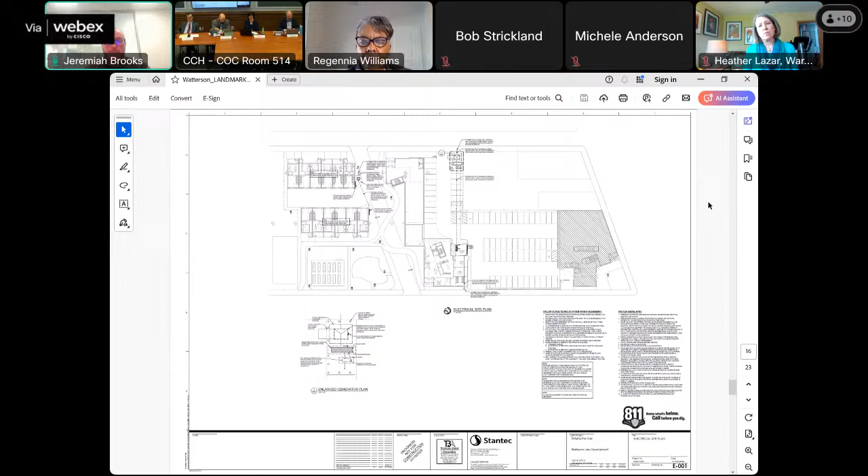Some early calculations for water retention. We want to use some of the site retention in and around the playground, setting the playground back from 75th and using that retention as a natural barrier between the street and the playground, so it provides visual shielding but also a physical barrier between children at play and the street itself.

Landscaping is something we felt was really important to this. As we continue to progress this project, regarding the paving areas, we hear there's an opportunity to reduce paving and increase green space to maximize the usability of this lot for the adjacent community.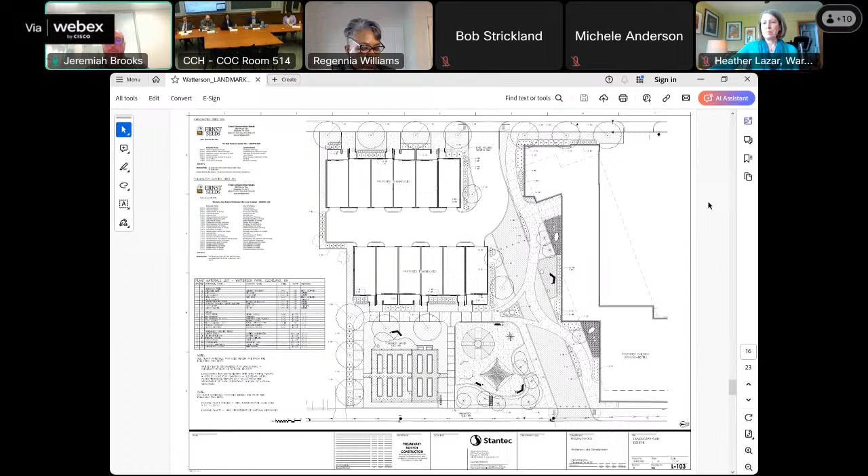A little bit of an enlarged area there on Detroit and 74th. Again, we mentioned a nod to the original footprint of the historic school. Obviously not set back as far as it originally was, but we felt it was important to have some green space there, with potential for a small park and plaza associated with the retail or business function that would ultimately go in.

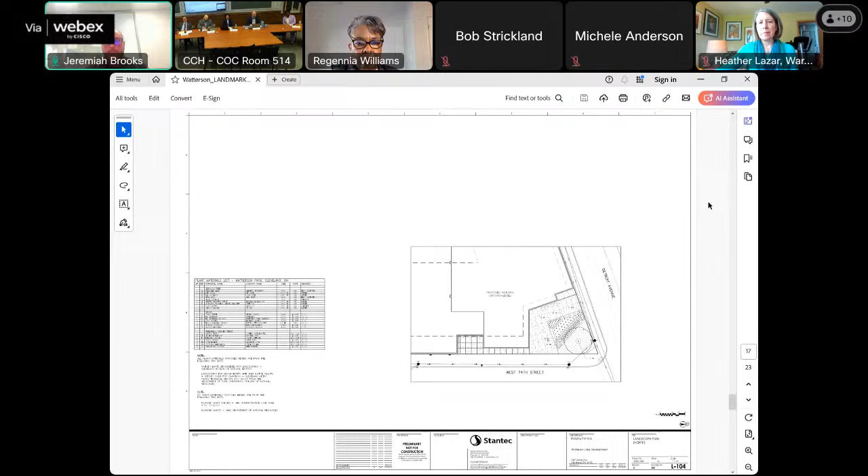I think this was just more of our site plannings that we use for OHFA to demonstrate understanding of grade, understanding the stormwater retention, and site lighting.

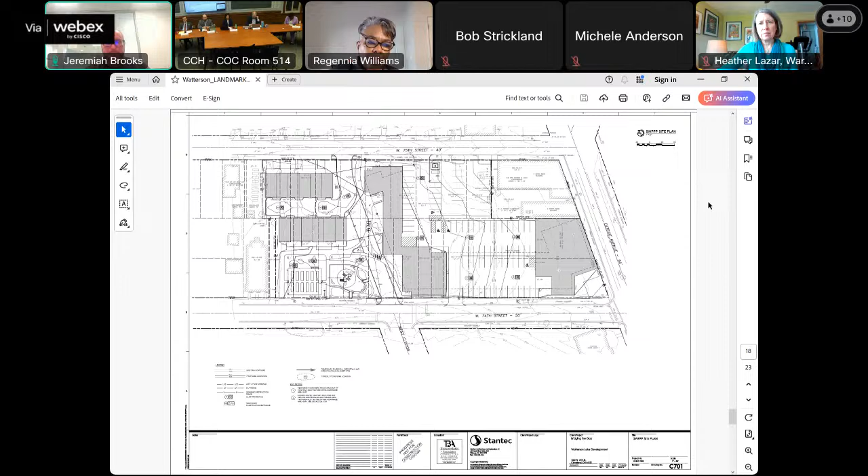Our approach for parking on this was to incorporate the city's new transportation demand management. We did just receive a new version of this the other day that came out publicly, and we're looking to approach it in a similar manner now that it is fully available.

But our program for this easily approached beyond the required points, and that's something we feel is really important for the site as well. Being in the transit district, along Detroit Avenue, we're looking forward to including amenities such as bike rooms, pedestrian stations with all the information for adjacent public transit, and also including a variety of options within our parking to address how it's decoupled from the rent structure and available to the business as well.

So that's our cursory pass at this - how we understood the RFP, how we responded to it, and now how we're starting to incorporate comments from community and landmarks. We definitely appreciate the comments you have today. All right, thank you for the presentation.

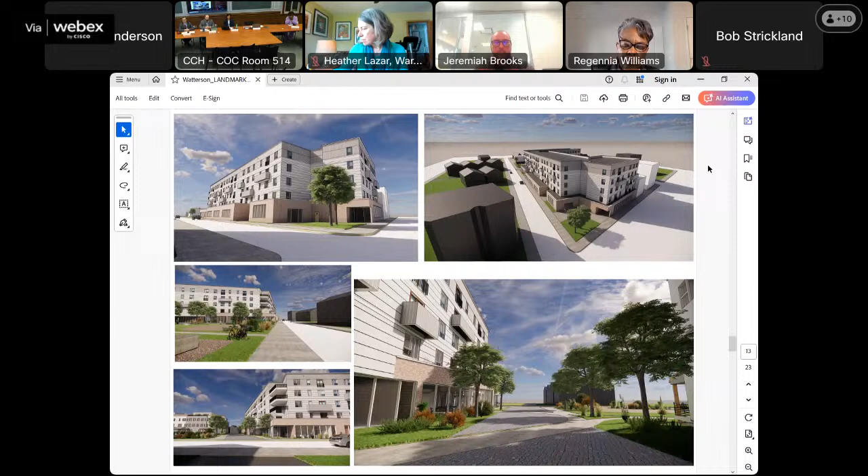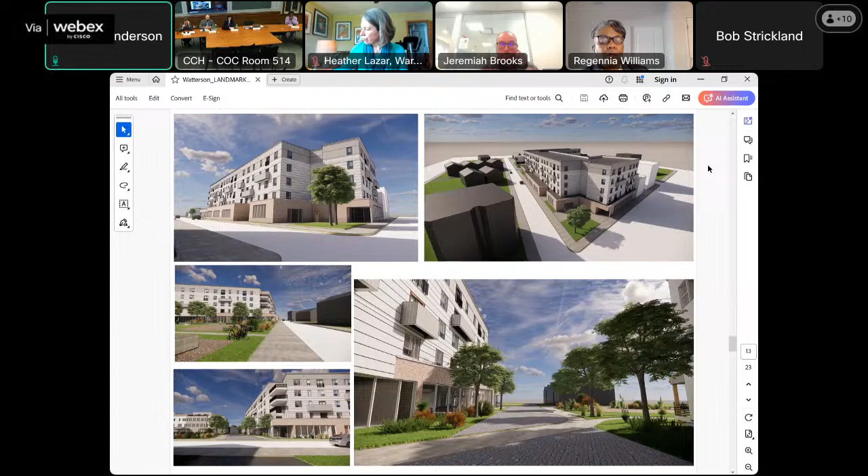It's nice to see that they're retaining the playground and the parking is underground. I have not seen the RFP, and I'm wondering how consistent the RFP can be with the requirements of the local historic district. Unlike a lot of other historic areas and commercial areas in the city, Detroit Shoreway is very blessed in that it has retained a lot of its original buildings, like the City Savings Building, which was threatened a while back, and the Gordon Square Arcade, which was also threatened, but they're now viable and part of the community. Another building is the Kennedy Building. I think the aesthetic and materiality and colors of those buildings should strongly influence what's going to be built in this area, because there's enough original there that consistency should be maintained. I really have trouble with the massing. The step backs and all that, I don't think adequately address the massing issues that I have.

I agree with staff regarding that pocket park or setback on the corner. The original Watterson Lake School was more than the setback, as they say — it was a very elegant, very handsome building. Instead of doing the setback, maybe putting a more inviting and interesting corner entrance, or just a corner there, would be preferred, at least by me. Maybe instead of the massing we have, we can eliminate that pocket park. The other thing is, I don't know whether there's a need for another community room. Mount Carmel Church has a community room, and I think there's one in the Gordon Square Arcade too, so maybe that could be incorporated into other programming, and that way we can eliminate some of the massing. So those are basically my comments.

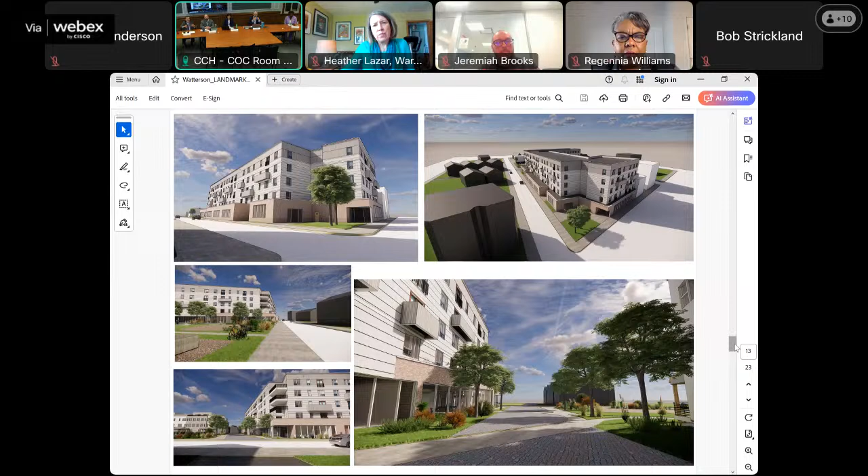Without resorting to getting too corny or too much variety, I see a lot of opportunities here for letting each one really speak to the particular urban condition it's trying to address, or the sensitivity to scale it's trying to solve.

So those are really my comments. Obviously, I applaud the project. I'm concerned less about the density per se than about how that density expresses itself, in a nutshell.

All right, thank you, Mr. Bueller. Other questions and comments from the commission?

I guess I'll go next. I do agree with a lot of what the committee had said, and Mr. Dulick, I think my main focus is also on Detroit.

Similarly to what the committee said, I'm in support of the project - sorry, I didn't start with that. I think it is a great use of this property, but I think the design needs to relate more to the surroundings.

Really break down the feeling - right now the design feels very podium with apartments above. So I'd encourage you to pull some of the mass closer to the street on Detroit and the two side streets so that it feels more in scale with the residential 2.5 stories on the south side of the property.

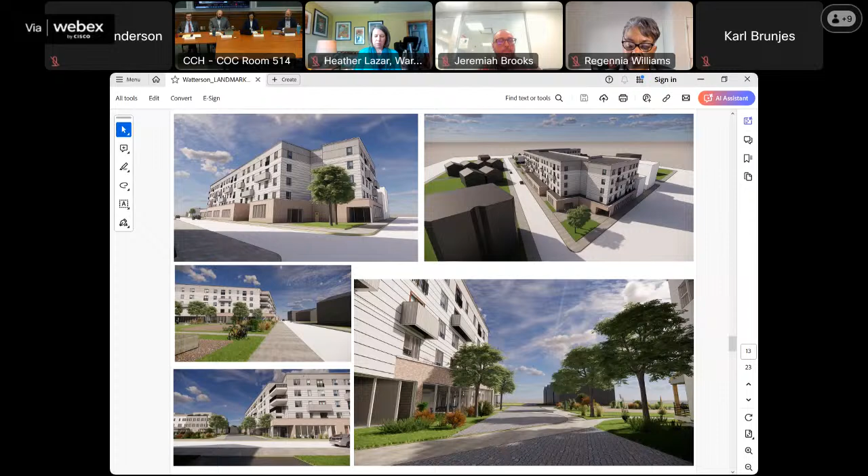I do think the corollary with the massing is the materiality. I feel very strongly that a lot of the character of the buildings of this scale on Detroit in the historic district is masonry. I think there's more flexibility as you go down, as you go around the site, but there's something about that Detroit piece from a materiality perspective. I would recommend considering a masonry expression. Look at the bank down the street, some of these other buildings, the building across the street — that is the character, that's the quality.

I think there's some opportunity for creativity with possibly bays or colors of masonry, what have you. But the size, the scale, and the strength of that particular piece of this project is what everybody's going to see, and it's going to send a very strong message about how important this project is, which I do support. I think that piece on Detroit warrants that level of quality materiality. Still understanding the budgetary constraints, I think focusing there for the balancing of where resources are allocated is extremely important.

All right, thank you, Mr. Hewlett. Not seeing any additional questions and comments from the commission. Does the applicant feel like you received enough feedback from the commission to continue development of your design?

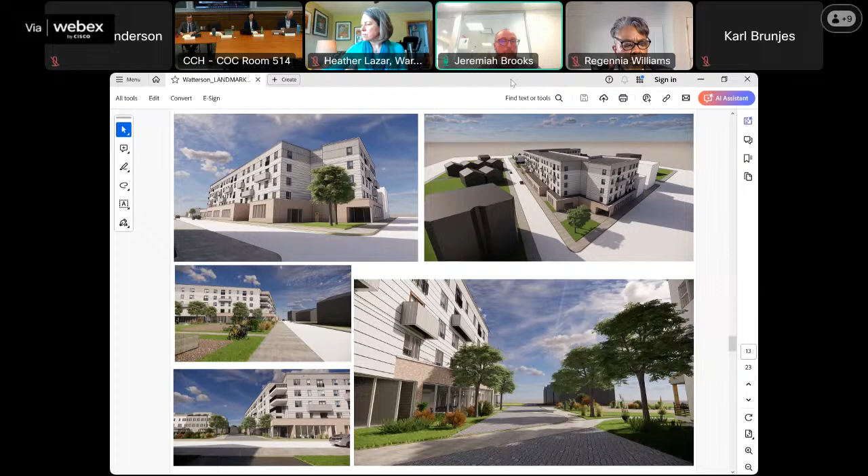Yes, we appreciate the comments. A lot of these are comments that we agree with, strongly agree with, and we're very excited to come back and hopefully show you something that is in line with both what we're thinking and what you expect.

Excellent, well we look forward to having you return. All right, thank you so much. All right, thank you, that concludes our concept plan reviews.

We will then move on to our National Register of Historic Places nominations. We have two on our front to review today. Go ahead, Mr. Musson. Thank you, Madam Chair.

I'll just do a quick summary of the Cedar Branch of the YMCA, or the Young Men's Christian Association nomination. It sits at 7515 Cedar Avenue. The Cedar Branch YMCA was constructed in two phases from 1941 to 1948. It is a T-shaped steel frame building clad with multicolored brick laid in a Flemish bond and trimmed with stone.

The base of the T has a square footprint that was constructed between 1941 and 1942, and in 1948 an addition was added to the rear or north elevation of the building. The rectangular addition forms the top of the T, extending just one bay beyond the original building. The original three-story flat roof structure is symmetrical in design with simplified colonial revival style features.

The building sits on the corner lot at Cedar Avenue and East 77th Street, and the Cedar Branch YMCA retains its architectural integrity, as a majority of the original building materials remain intact, and it remains unchanged in its setting, size, and scale.

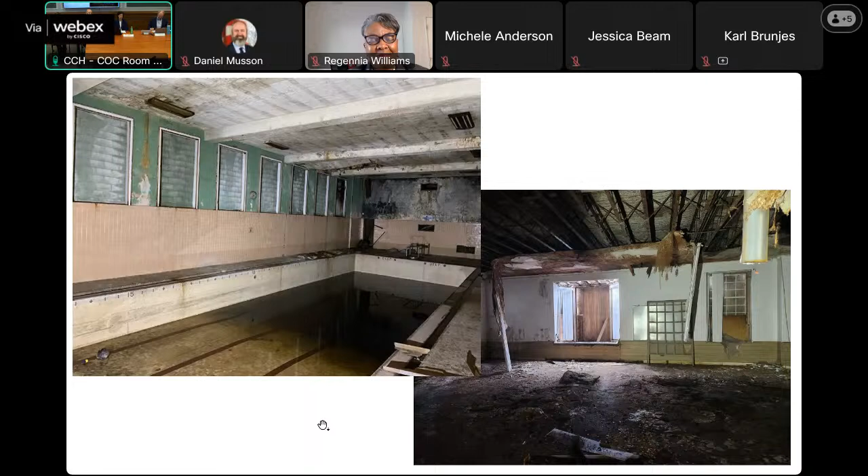Excellent. We'll move then on to our next nomination, the Erie Street Cemetery Historic District.

Hi, good morning. Okay, so do I press this button or this button? This one? Yeah, it's totally counterintuitive. You can look at either one. This one moves faster than that one right now, today. That one has a little bit of a lag.

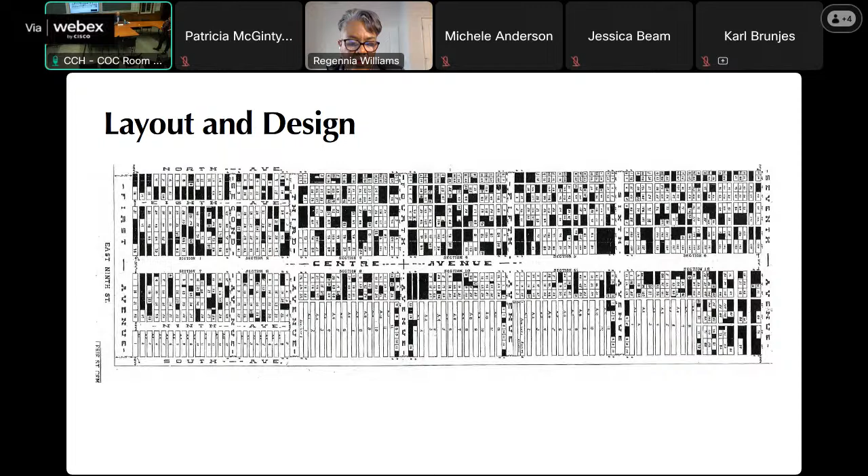The largest rehabilitation to the grounds occurred in 1939 through a WPA project, and that's when the stone walls that are there today, as well as some other work, occurred. This is what the walls look like - it was just metal fencing prior to that.

That Gothic Revival Chapel once stood in the center of the cemetery, but it was demolished in the 1950s. The sandstone footprint of it still sits in the center of the cemetery, but unfortunately it's no longer there.

This is what the grounds look like today. Very different. A lot of that landscape design was removed in 1939 when the sandstone walls were built.

Unfortunately, it caused landscape sod movement to occur because there were no longer well-draining drainage paths with gravel or brick, and a lot of the sandstone curbed lots were removed. I believe a good amount probably still exists underneath the grass, but unfortunately you can still see some of them, but not all of them.

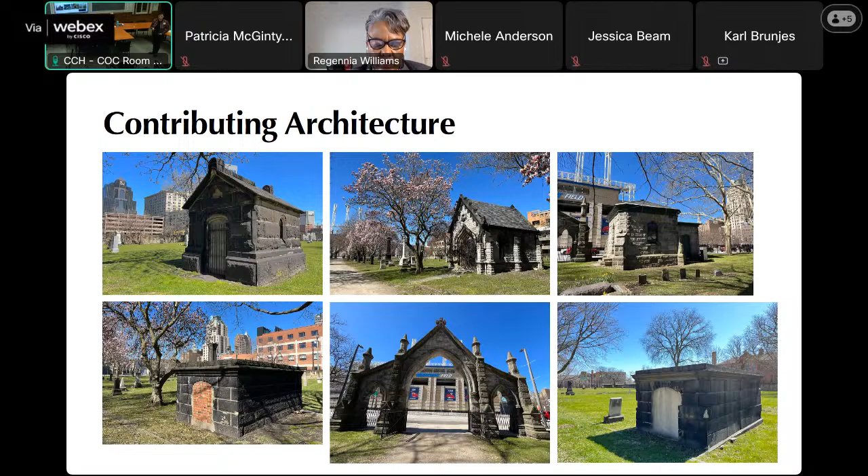I found that Joseph Ireland designed the gateway and the gatehouse, and J.D. Copperfield, who was a stonemason in Cleveland, worked with him and did the stonemasonry for both. Copperfield worked with Ireland on a lot of projects, including the Monroe Street Cemetery gatehouse and gateway, I believe. I can't remember, it's just the gatehouse and gateway there.

The architectural perimeter was put in in 1939, and it consists of 8-foot tall sandstone walls. I just want to note that these rectangles on the walls were integrated into the design and represent where those avenues, shown on that map, once intersected the cemetery before they were removed.

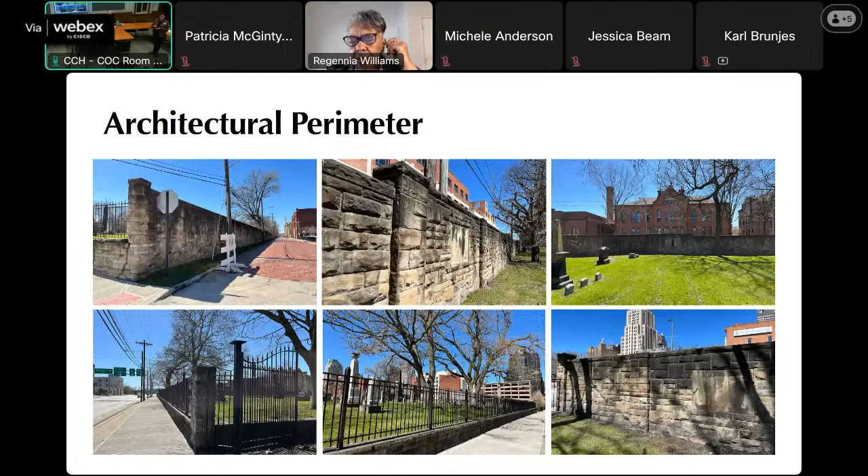Here's some of the contributing objects, which are really only being considered contributing if they either architecturally contribute or are part of the areas of significance of settlement or Native American heritage.

Here's another one. These are the graves of some of the first 16 early settlers. This really just represents the bodies that were moved from Ontario Street to Erie Street, because a lot of them are unmarked graves.

During the 1939 project in front of the gateway, because before that existed the grounds extended further into East 9th Street, they found about 4 bodies, likely when they were putting in the sidewalk or doing work on that East 9th Street wall or border. I don't know if more bodies are out there or not—I feel like that should be considered—but the bodies were moved inside the cemetery, and that's what that unknown early settlers marker represents. It was a dedication to the reburial of those 4 bodies, along with probably other ones.